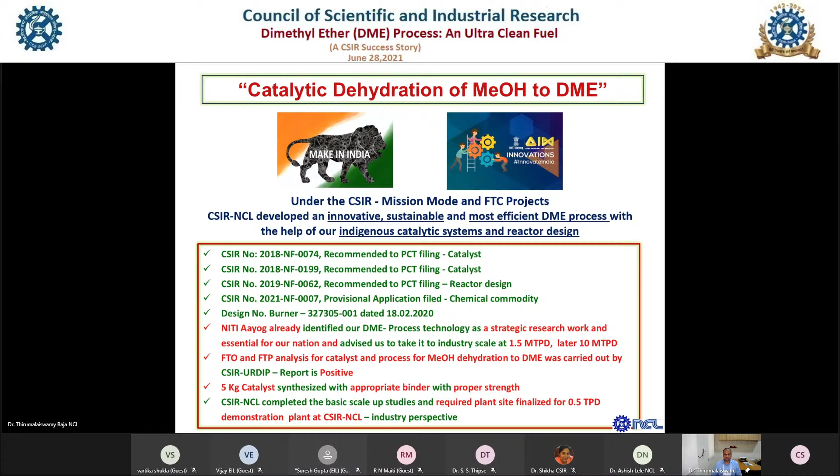What are the properties of DME? As Dr. Ashish Lele told, DME is one of the most promising second generation alternative fuels, and globally it's considered an ultra clean, green, and low carbon emitting fuel.

So we are closely working with ARAI. DME can be used as a fuel in diesel engines and gas turbines without any modification. This possibility is there, so we are doing both things simultaneously with ARAI.

And giants like Nissan and Volvo developed heavy vehicles running on diesel engines in past years. So LCV as well as high commercial vehicles are also possible with DME as a fuel.

As an alternative fuel, when compared with fossil fuels, DME performance demonstrated a number of significant benefits. One is less pollutants like hydrocarbons, soot, and particulate matter, less CO2, less nitrous oxide, and no sulfur oxides than conventional fuels, which help restrict the level of pollution across the country. When using DME as fuel, engine noise will be less with high fuel economy.

Ignition character is also equivalent to diesel engines since it has high cetane rating up to 55 to 60 compared to fossil fuel diesel. It has a low boiling point of minus 24.8, which provides fast fuel-air mixing, excellent cold start, and reduced ignition delay in cold countries.

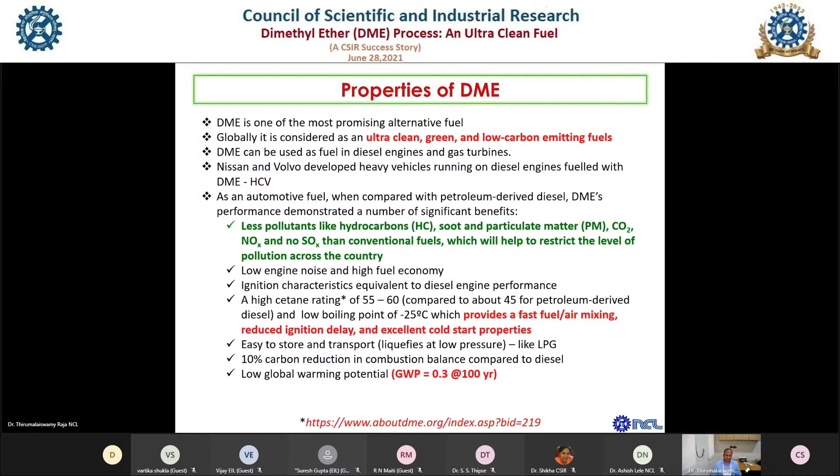It has very good properties like domestic LPG, easy to store, easy to transport, and easy to carry everywhere. There's a 10% carbon reduction in combustion balance compared to diesel, though we are still awaiting ARAI results. It also has very low global warming potential, 0.3 at the rate of 100 years.

These properties are for comparison. As I said, it is equivalent to LPG. LPG is nothing but propane, whereas in our country propane and butane vapor pressure is almost equal, so it can easily substitute up to 20%.

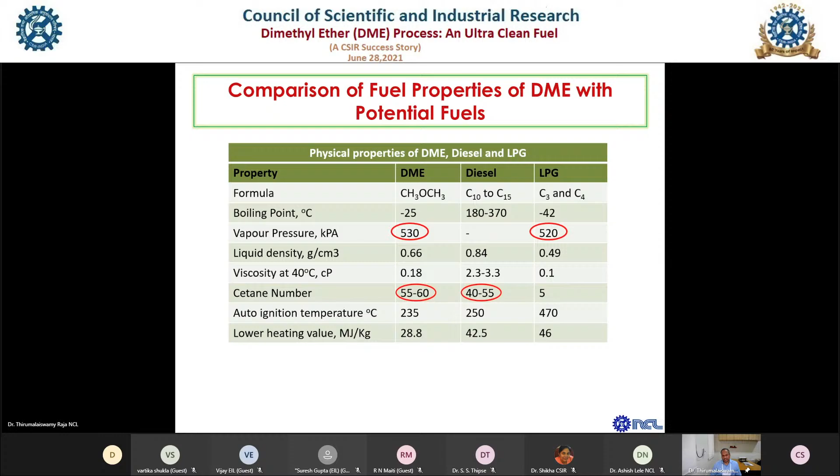The cetane number when comparing to diesel is almost equal, so it can be replaced for mostly LCV and HCV. We are even trying to extend this to ships and other applications through government schemes.

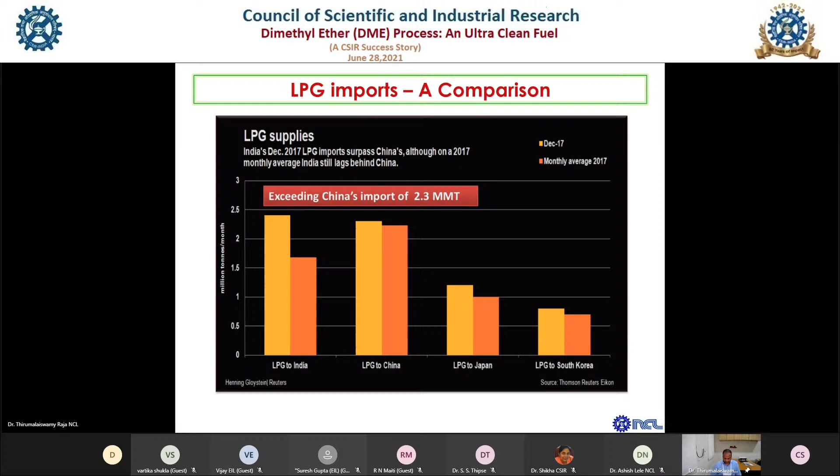We need to curtail this kind of foreign exchange spending on LPG imports. So CSIR developed an ambitious project through mission mode to reach the people, one being DME as a substitute for LPG as well as diesel. India is the world's largest LPG importer, and in 2018-19 India imported around 226 million metric tons of crude oil, from which LPG comes.

The ambitious project of Prime Minister Ujjwala Yojana provides clean cooking fuel for below poverty line people to give energy justice, which drives the demand furthermore.

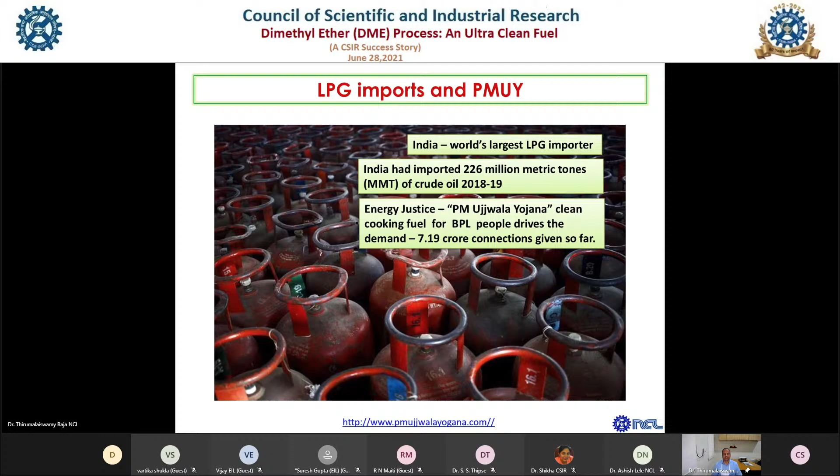So far we have 7.19 crore connections given, and it's likely to be more due to COVID and lockdown reasons. The government's push to provide clean cooking fuel to every household has turned India into the world's second largest LPG consumer, whose demand is projected to rise 34% by 2025.

The compounded annual growth rate is 15% comparing 2014 to 2017 LPG consumers. Rapid increase in population combined with LPG penetration in rural areas has resulted in average growth of 8.4% in LPG consumption, making India the second largest consumer and importer of LPG globally. As per our Oil Ministry's projections, LPG consumption is expected to grow to 30.3 million tons by 2025 and 40.6 million tons by 2040. So the demand is clearly more.

So we need to give a technology which is self-sufficient and self-reliant within India. CSIR developed, in 2017-18, a mission mode project, and under this we developed this technology. Already India has 191 LPG bottling plants operated by PSUs, and with our technology we can have something modular and easily mobile. We can put it there and blend it with LPG with DME around 20%, or whatever the regulations allow, and supply it through 22,654 LPG distributors.

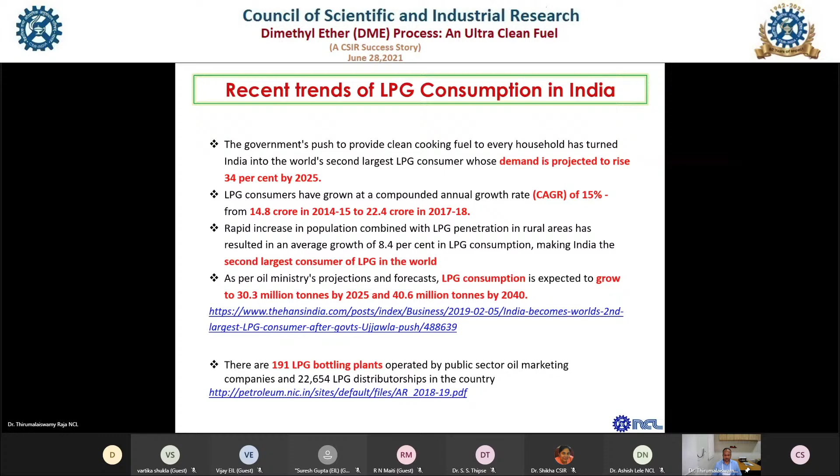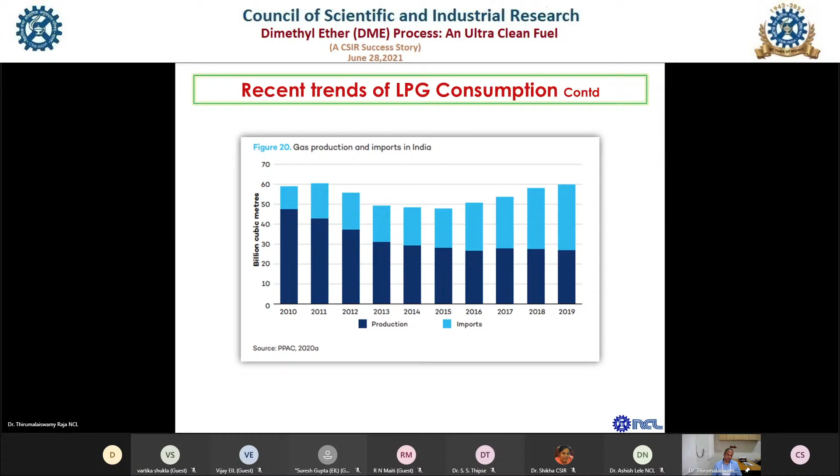The import is quite high here. This is a graph of LPG consumption, crude gas production, and imports in India. The production is almost steady state, while the imports are growing exponentially. So we need to take care that foreign exchange should not go out.

So what did we achieve during the process of the DME project? Two molecules of methanol give one mole of DME and one mole of water, and it does not lead to olefins, which is an impurity particularly for fuel. Whereas we've patented a process where, under certain conditions, we can also get olefins - we know how to produce olefins using the same process.

Under this project, around 50 catalysts were synthesized and screened for activity and selectivity, and the best one was selected. The optimized reaction conditions are 250 to 280 degrees Celsius at atmospheric pressure, as well as at 10 bar pressure, for the best catalyst. Conversion achieved was 88 to 89%, with 99% selectivity for DME at atmospheric pressure.

The scale of operation ranges from 1 gram to 1 kilogram - lab scale to pilot industry scale. At 10 bar high pressure, because of the post-processing unit we need higher pressure, even up to 12 bar. Conversion was achieved through our modified patented reactor, reaching 99% conversion and 99.5% purity or selectivity for DME.

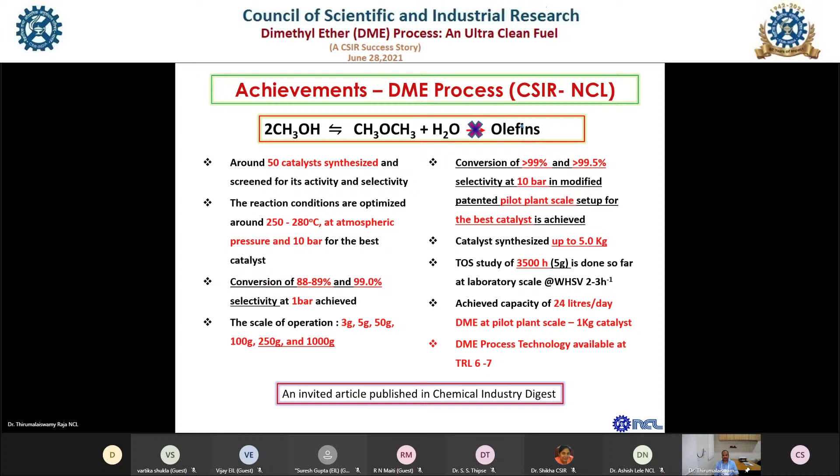At present, our technology level is around TRL 6 to 7. Now let's show a small video of how we were evolving.

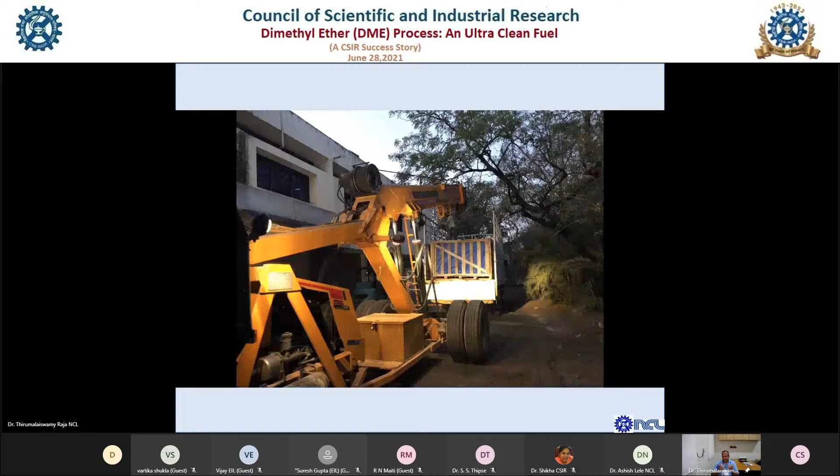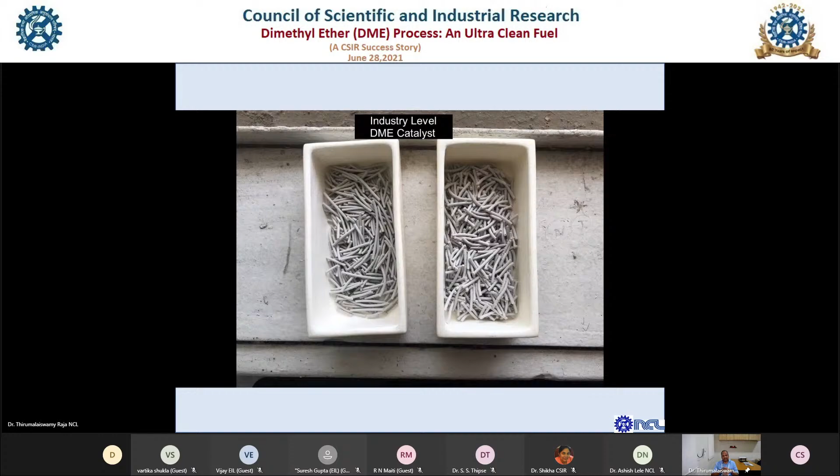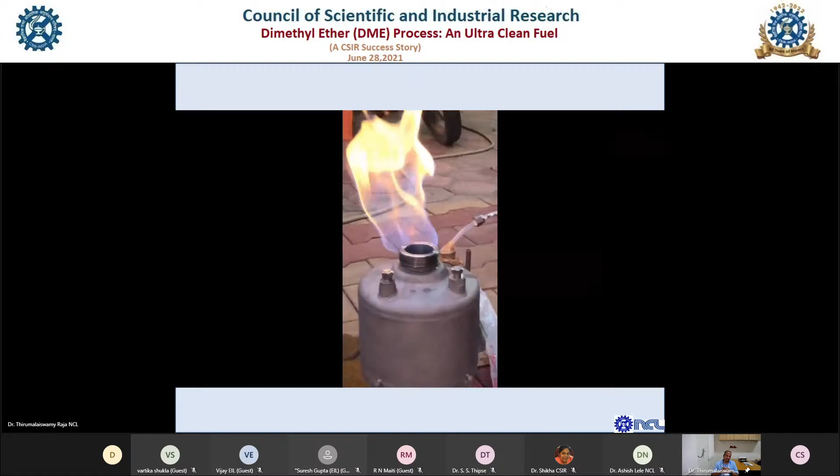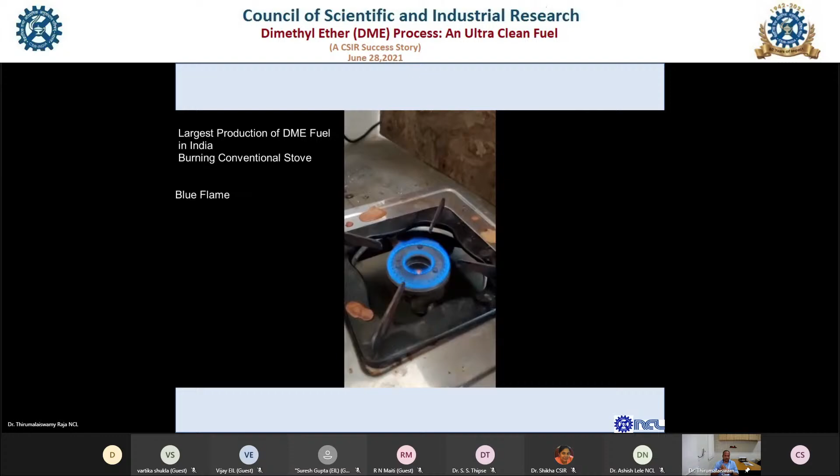This video shows NCL and how we obtained the instruments. This was a meeting at the pilot plant developed at the university, and this is the DME plant with world-class facilities - patented reactors installed for all users. This shows an industry-level setup with different reactor shapes, a trial run with DME, and the first time in India rolling out DME with all safety precautions in the lab. This demonstrates the reactor at the highest level of DME production, demonstrations with other companies, large-scale DME production, and testing on a conventional stove for cooking gas.

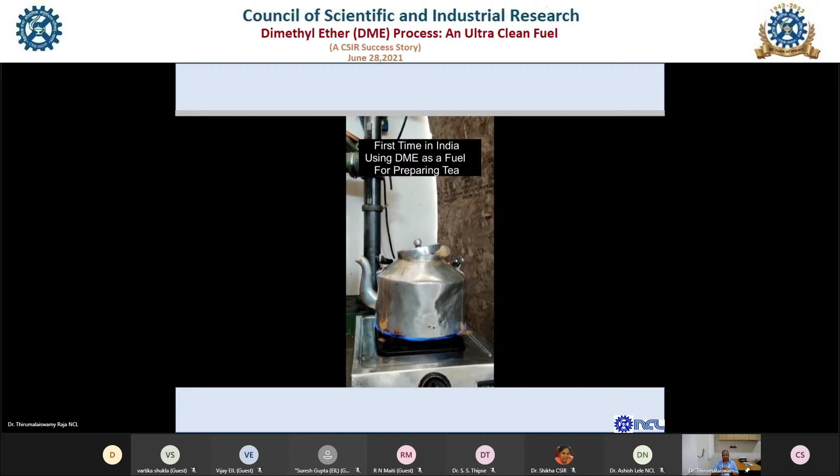Then, for the first time, early morning at 6 o'clock, we prepared tea using DME as the fuel.

For this indigenous catalyst and how it evolved, how best our catalyst is, we have taken all our available commercial catalysts and compared them with our catalyst and our sister laboratory catalyst. When you see the different space velocities as well as different temperatures, NCL is giving an optimum temperature of 260 to 270 at atmospheric pressure at a space velocity of 2. It means that if you are putting 1 kilogram catalyst, I can put 2 liters, so the productivity will be more.

And here there is no co-feed with nitrogen or any inert gas, whereas all over the world they are using N2 as a co-feed. So NCL's indigenously developed catalyst is showing better activity compared to the available commercial catalysts.

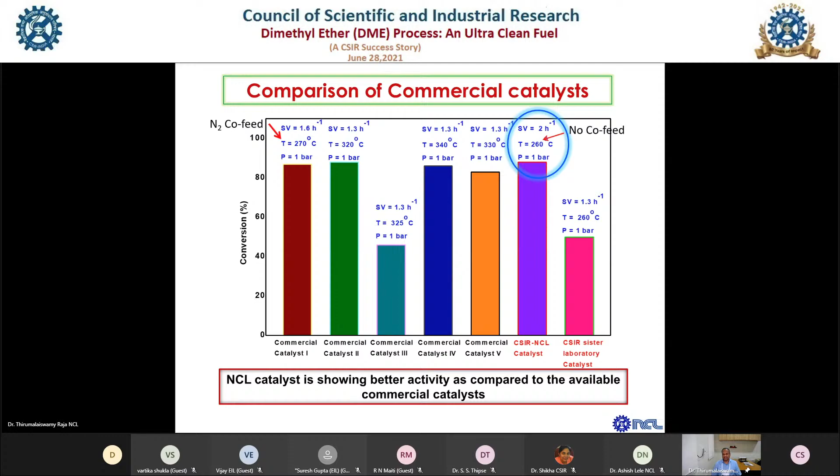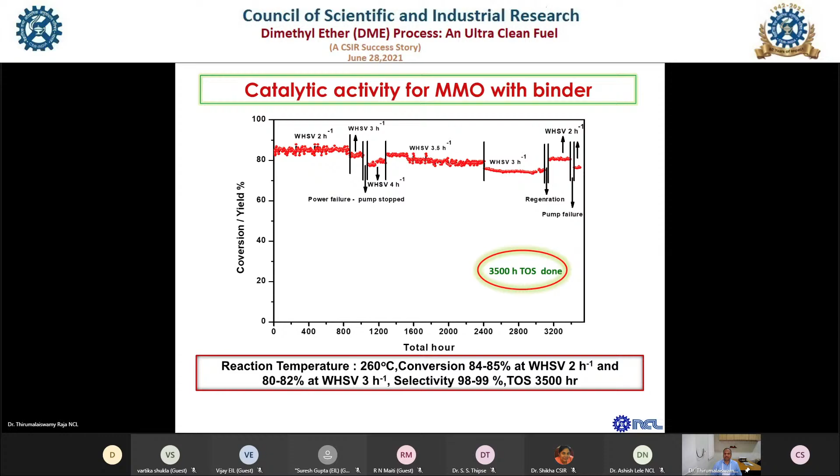This is very important for anyone interested in our technology. As I said, we are patented or IP protected for our catalyst as well as the reactor. So comparing the conventional reactor with the modified reactor from our engineering team, under different conditions our modified catalyst and modified reactor improved conversion as well as yield of DME. The patent is already granted and published.

We have practiced almost 1 kilogram catalyst loading level, as well as 250 gram, at different space velocities.

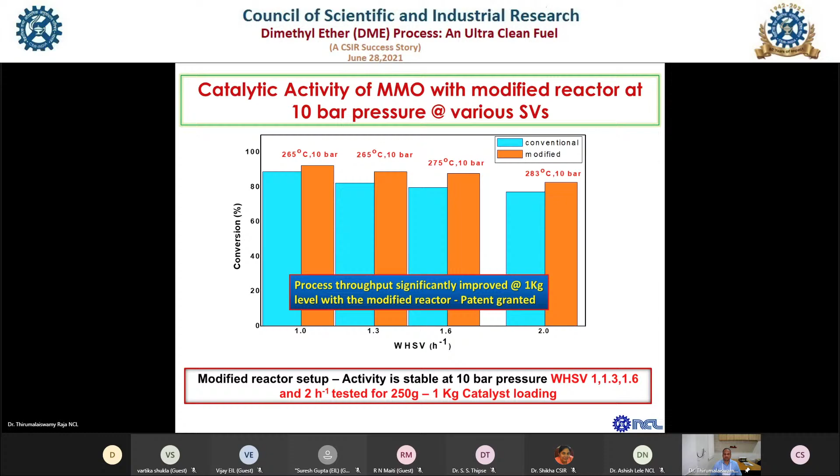Catalyst scale-up has also been done at 5 kilogram and now 10 kilogram scale, achieved with different shapes and extrudate shapes as well as different kinds of binders. We finalized one with a separate binder at a different percentage, and then developed crush strength testing both with the vendor and ourselves, so it has good crush strength and will not crumble during loading at higher scales.

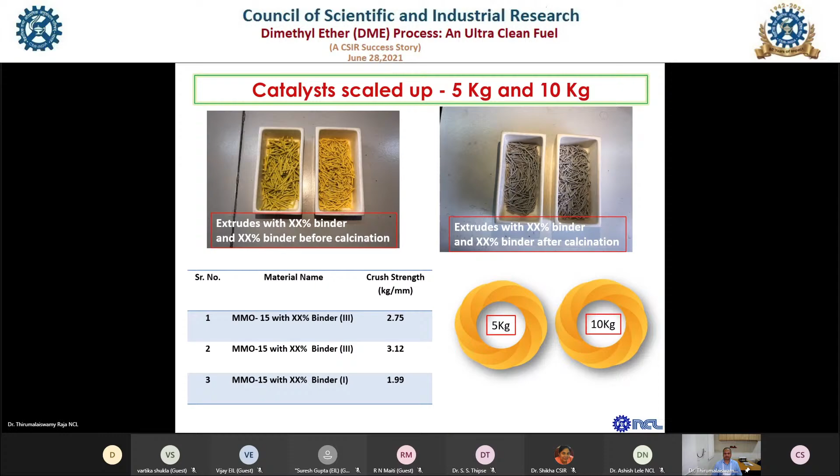These are the pilot scale patented reactor reactions. We are practically getting 24 liters per day. Here also we ran this catalyst for 575 hours time on stream. As I said, in the conventional reaction almost 85 to 88% conversion is coming.

When we put distillation coupled with the reactor to remove the water molecule, along with heat integration, the conversion comes to almost 100%. The product also improves, and the exothermic reaction heat is utilized properly for the plant.

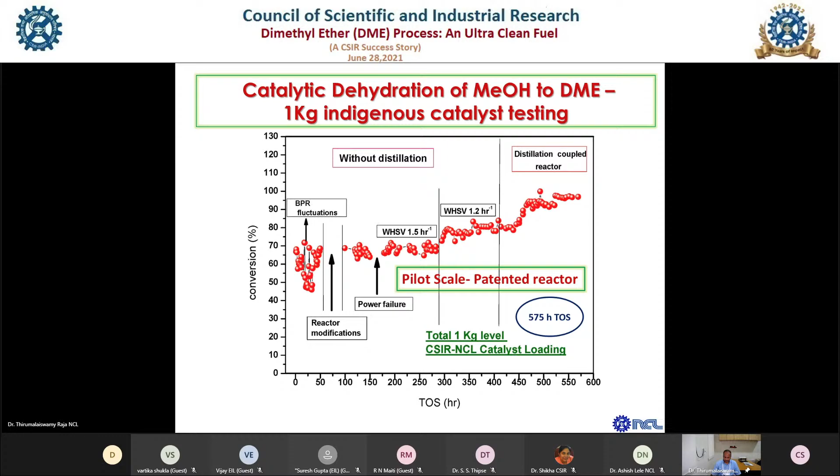And here is a small video once again. Dr. Harshvardhan, our Honorable Science and Technology Minister, visited here personally before COVID, along with Dr. Professor Shekhar Mande, Honorable DG CSIR, and inaugurated our pilot plant. He was felicitated by the ex-director and coordinating person Tania. This is the DME plant which he inaugurated on September 9, 2019.

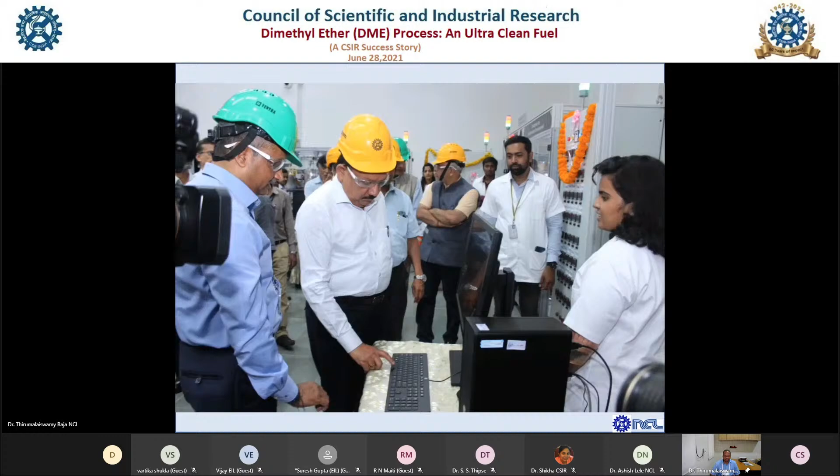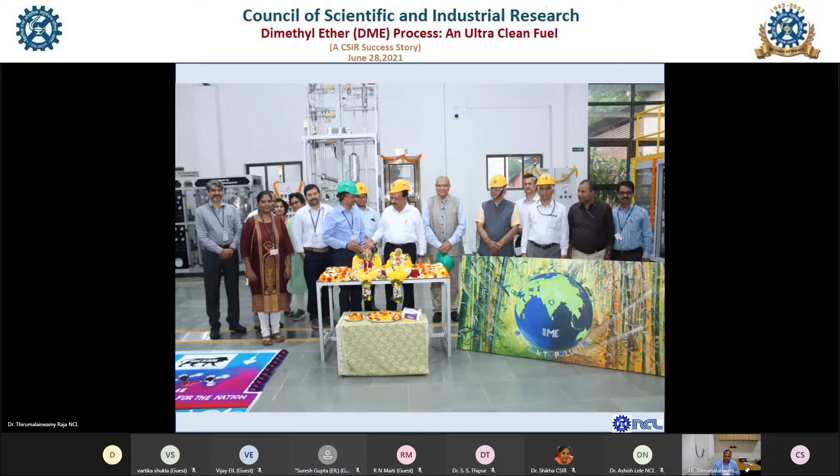So these are my divisional colleagues, and this is my research team, comprising of engineers and scientists.

After getting the DME, we need to utilize it. So we have plans for how to utilize it for fuel purpose, to reach people for domestic burners. This is a PFD of a burner using DME as a fuel. Separately, we have developed a gas stove with the help of CFD - an energy efficient burner that can be used separately. You can use DME as well as LPG-DME blend also.

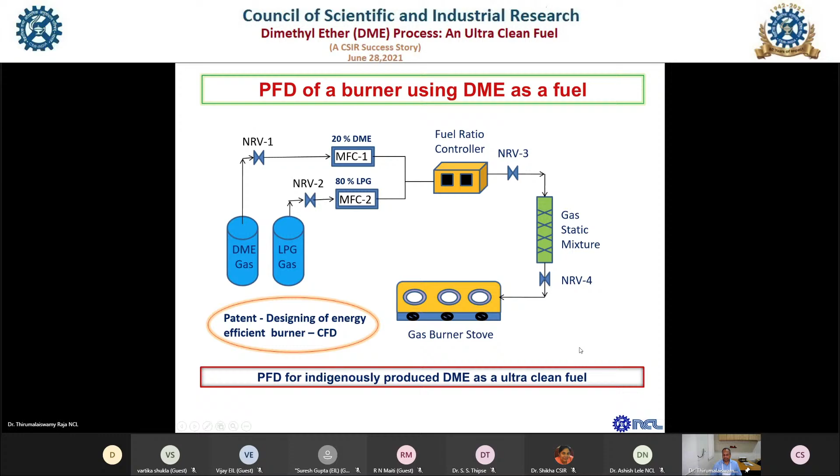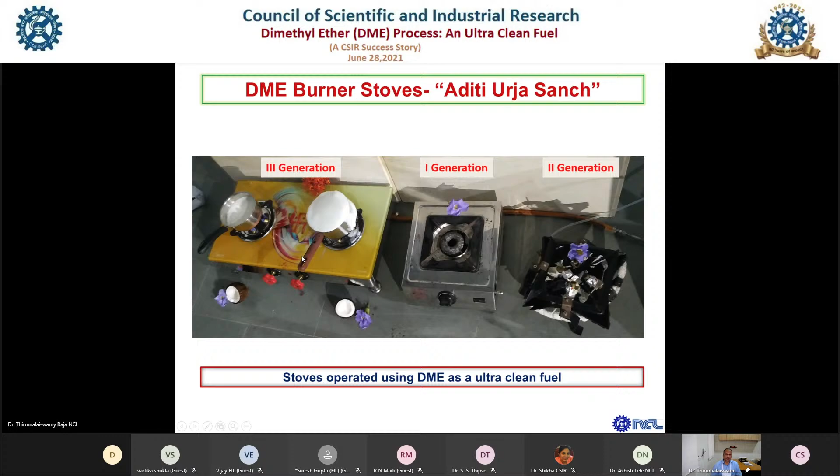The third generation is the domestic fuel stove as such. It looks like a domestic burner, but inside is our technology incorporated. So first time we operated it, boiling milk, and we demonstrated the Aditi Urja Sanch inside NCL with different classes of people, technical and non-technical, to get their inputs and feedback for domestic purpose use of DME as well as DME-LPG blend. This was the first time we used 100% DME directly as a fuel in the burners.

This is a semi-skilled worker, Vijayaraman, and this is Mr. Jogdand, technical officer as well as safety officer in NCL. At their home and everywhere we practiced, examining how it works. He's technical staff, and he is an electrician in the electrical department, along with Mr. Mane, who has helped us a lot with the stove fabrication and everything.

Another one is Yogesh Mahajan, junior technical officer. At home we made tea again, and we demonstrated this stove, making maybe around 500 to 600 teas on the canteen cafeteria itself. Mr. Raut from the mechanical section helped us fabricate the connections and everything, and these are the other beneficiaries.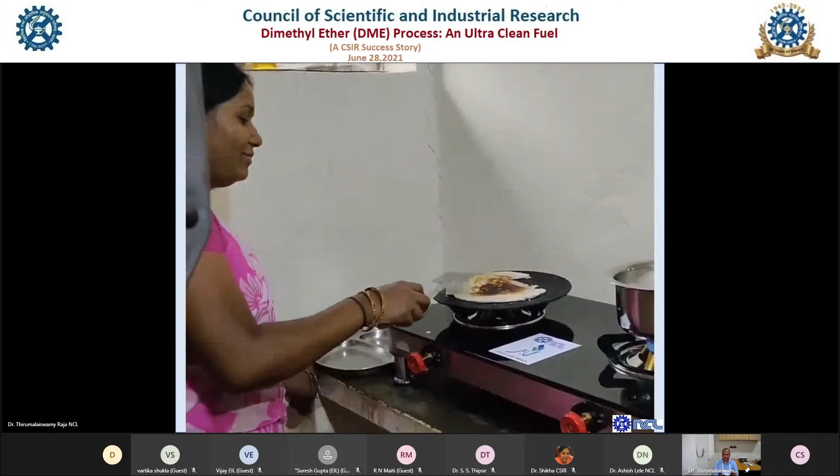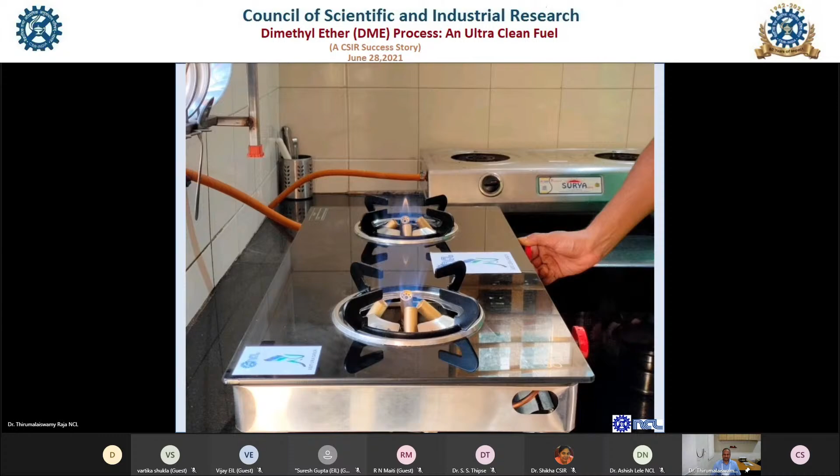For food trials we used this cafeteria - thanks to them, as well as others who allowed us to test our burner and everything.

These are the achievements of what we have done. Data was collected for the performance of Aditi Urja Sanch using DME as a fuel or DME-LPG blend as a fuel for the burner. Indigenously we have developed, designed, and fabricated the nation's first industrial DME fuel boiler unit, which we demonstrated, along with the nation's first DME fuel automotive engine demonstration with the help of ARAI.

The next video shows that this is the first in our country. We have practiced using DME as well as DME-LPG blend, and we also have a DME-LPG blend bottling unit, and combustion trials for actual domestic use.

CSIR also sanctioned a project under fast track commercialization to have a demonstration plant of capacity 0.5 tons per day for our DME process technology, for various collaborating industries. We have also supplied DME-LPG blends to the Bureau of Indian Standards through IOCL.

For the future, we have planned to have 100 liters per day DME, scaled up from what we prepared at 5 kilogram level. The reactor has come under modifications, and we have to start it again. After that, due to COVID, we have hampered a lot of our work here. Once all restrictions are removed, we will continue on this.

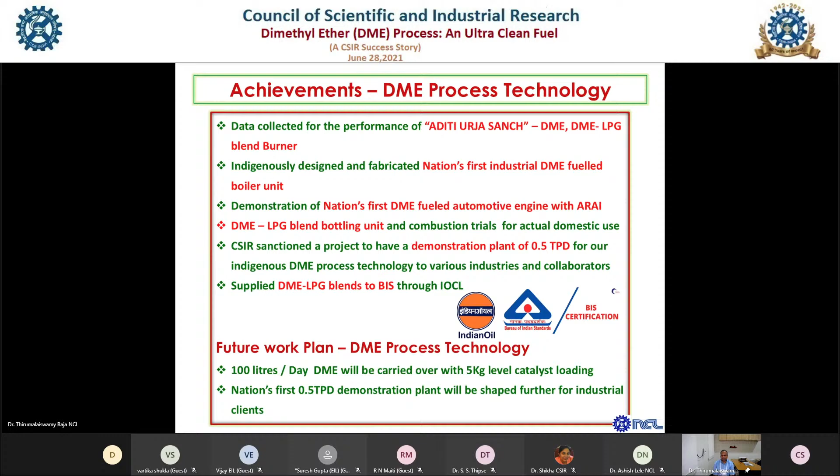We also have the nation's first 0.5 tons per day demonstration plant. It will be shaped further for industrial clients.

We have also signed with ARAI for testing DME fuels and various works, and signed agreements under the sister concern of Deepak Nitrate. And with EIL, we signed an MOU for erection of a large scale unit of DME for refineries and other industries.

And by doing so, what is the outcome for our country, the nations? This DME process technology is more helpful for the revival of methanol economy, which creates employment, and it is offering an ultra clean fuel to bring down the level of air pollution across our country.

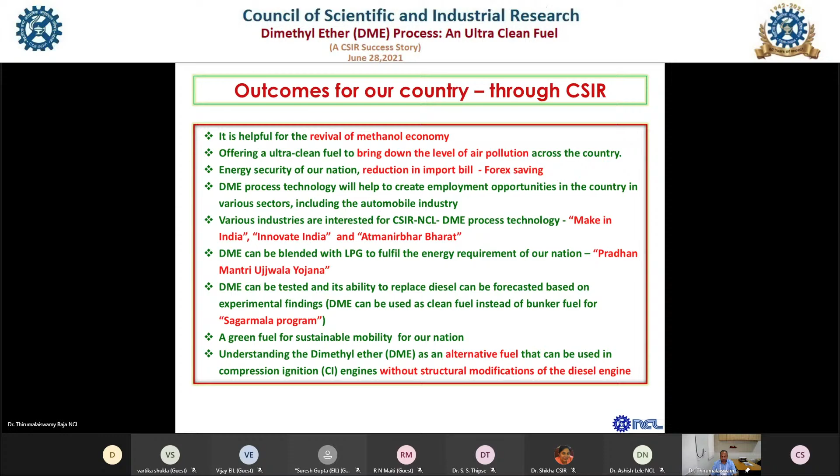I'll talk about the primary drivers which I feel right now for any alternative fuels in India. I've just listed them here.

Of course, the vision of Atmanirbhar Bharat in terms of self-reliance in fuels. Also, GHG mitigation has become very important, particularly the greenhouse gas and global warming effects. We have also signed the Paris COP agreement, and we really need to adhere to the goal of low carbon mobility to ensure compliance to having the temperature rise restricted to below 2 degrees.

Also, local environment pollution plays a major role. If you see, our major cities are being referred to as the most polluted cities in the world. So this is one major issue of concern. And in terms of boosting the economy, having fuels which will generate revenue for the country rather than spending money on importing fuels is one of the major tasks at hand.

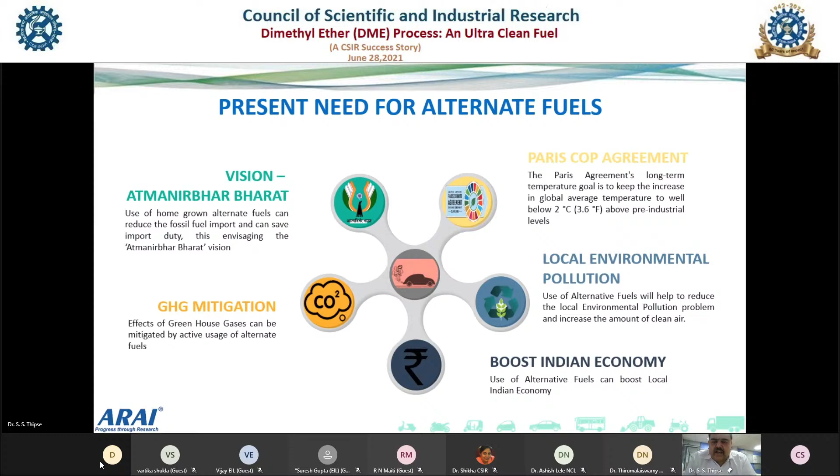And I feel DME fulfills all these criteria. So it is one of the very good fuels for the future.

Going further, Government of India has released notifications for several alternate fuels. Now, in the last few years, we have seen notifications ranging from bio-CNG, ethanol, hydrogen CNG. But the most important thing to me is the first synthetic fuel notification, that was for DME, which was released in January 2020 - a real landmark because we had notifications for gaseous fuels, we had notifications for biofuels, but

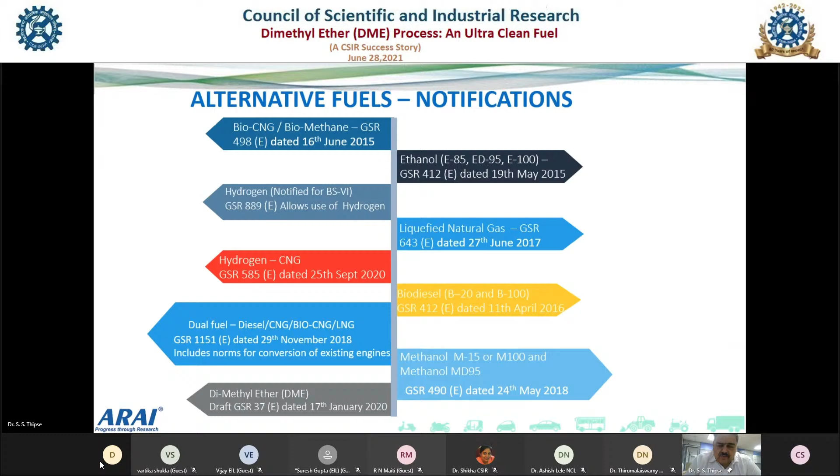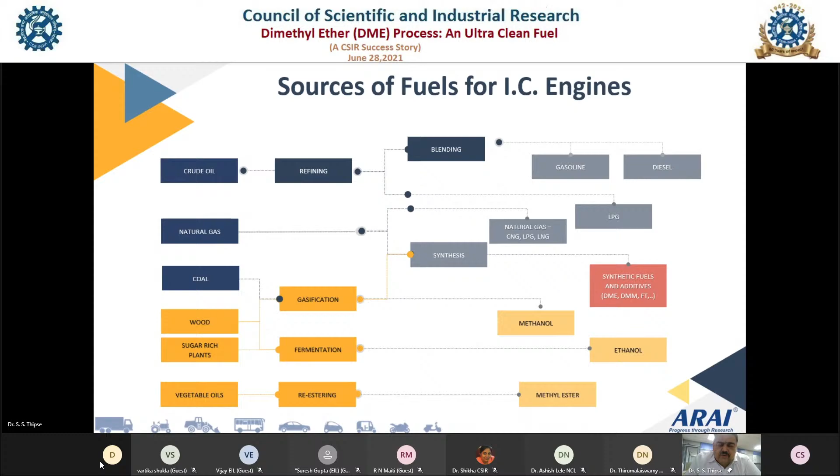to have a notification for a synthetic fuel in itself was a big achievement. And I must say that ARAI played a major role in terms of releasing this notification closely along with the Ministry of Road Transport. Now, we are in the area of alternate fuels, and synthetic fuels play a major role. Now, DME can be generated from multiple sources.

Traditionally, it is formulated from natural gas synthesis. But now the method developed by NCL is to dehydrate methanol and then generate DME. That's a very good method. And essentially, as an engine fuel, it's ideally suited for a compression ignition engine because it has a cetane number more than 55. So really, it is one of the very good fuels.

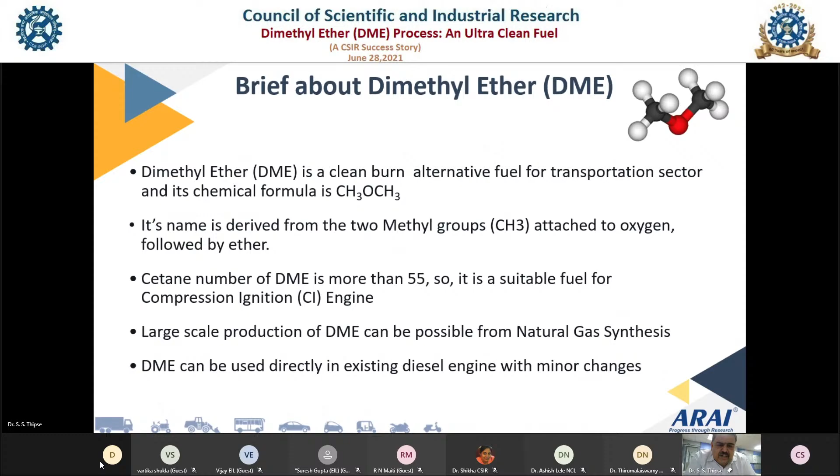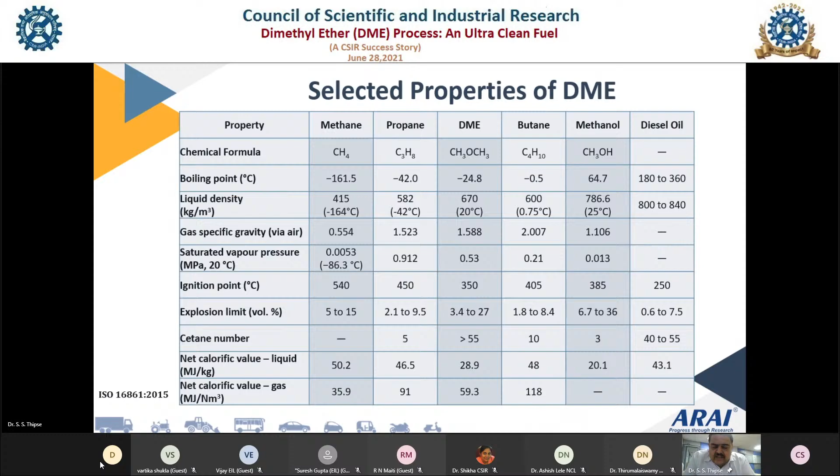I'll give some data, international data also, and what ARAI has done in this. If we see it property-wise, it has excellent properties, more like a vapor at room pressure. And then when you pressurize it, it becomes something like a liquid. So the characteristics are similar to LPG, and hence you can store it very easily in an LPG cylinder. These are some of the characteristics which make DME very simple to handle. So it is an ideal CI engine fuel, but the characteristics of handling are similar to LPG.

Then again, as I mentioned, DME can be produced from multiple methods, but I think dehydration of methanol is a good area where we can work.

Then DME worldwide - who has done what? We found there are certain studies already conducted worldwide on DME, particularly in countries like Sweden, where Volvo was very much involved in using DME as a truck fuel. USA also did some basic work on DME with government labs, and in Germany, Aachen University and others have also partnered. Denso has supplied the fuel injection equipment. AVL also, in Austria, has worked on DME fuel and developed a DME common rail.

As far as India is concerned, DME was initially started off way back in '98 with IOCL, GAIL and IIP. But then later on, not much progress was done. And eventually ARAI and NCL got together and we demonstrated the first three-wheeler on DME-LPG blend.

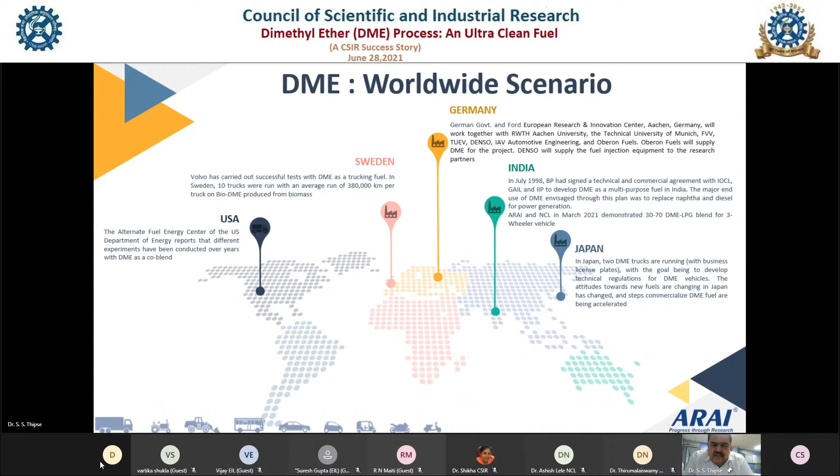Then in Japan, 2 DME trucks are running with the technical regulations. A lot of activity on DME in Japan - they have several standards and they are contributing to ISO standards also.

If we see the worldwide applications, this is a multi-purpose fuel. There are multiple applications - it's not just restricted to automotive, but it's useful for power generation. Again, Dr. Raja showed many of the different applications.

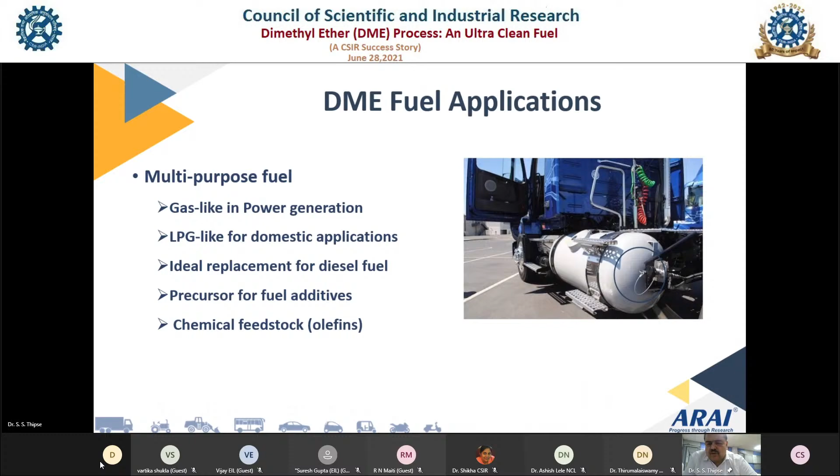So DME is a precursor to fuel additives. It can be an ideal replacement for diesel, or for LPG and so on. On the right side is a truck based on DME running in Sweden. These are some of the engines already developed worldwide: Volvo truck, Scania, an SAIC engine in China, and a Mack engine also running on DME. Typically these are 6-cylinder, 8-cylinder engines suitable for truck applications.

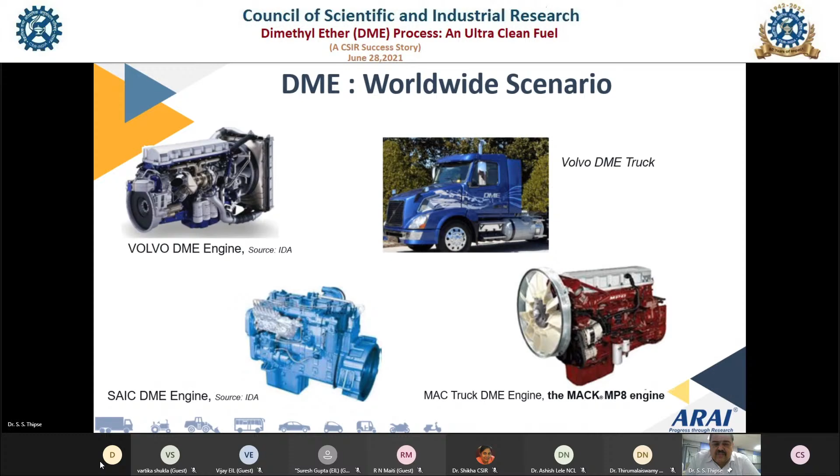The truck application works because, in terms of characteristics, DME is similar to diesel, so the torque and power characteristics are good. Although the calorific value is less, that can be compensated by having different turbocharging techniques, special applications, increasing manifold volumes, and different ways to recover the power loss due to lower calorific value.

Coming back to standards and regulations, India has already adopted the ISO standard for DME. This fuel standard has been dual marked by our Bureau of Indian Standards, and that standard is already adopted - ISO 16861 for fuel quality. So we already have a DME fuel quality standard in place.

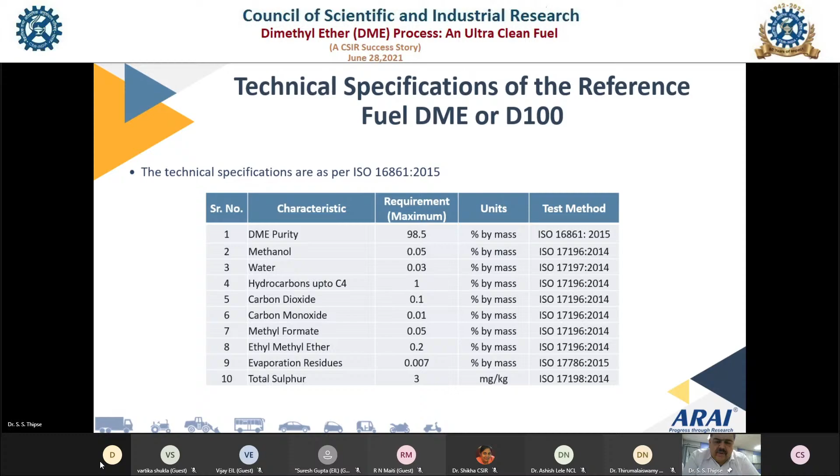The second point is, as I already mentioned, GSR 37 has been released, and DME as a fuel for both below 3.5 ton and above 3.5 ton vehicles, as well as three-wheeler vehicles, the norms have already been released. What tests are applicable have also been specified. This is the reference fuel, ISO 16861, which India has adopted with a purity level of 98.5% and all the remaining parameters as explained.

Then the components. Just having a fuel standard is not enough; we also need component standards. By component, I mean the fuel systems, injectors, valves, and pressure relief devices. So we are adopting the ISO 22760 series. There is a committee, BIS TED 26, chaired by ARAI. I am the chairman of that committee, and in it we are discussing and adopting various fuel system components.

We have CNG with the ISO 15500 series, LPG component series, and similarly we now have the DME series. In that, there are almost 18 to 19 component standards. At least 6 parts are already developed and in wide circulation. This committee is going to finalize all the component standards, which will ensure there is a safety net for Indian manufacturers. They can conform to this standard, which is at par with ISO levels, and then supply these systems in India.

We are also developing the AIS safety standard for DME and LPG. The LPG safety standard is already available, but we are now adopting the same standard and extending it to DME and DME-LPG blends. Only thing is the gas cylinder rules need to be amended for DME, so we have initiated dialogue with PESO for inclusion of DME as a fuel, since the Ministry of Road Transport has already notified it. We are hoping PESO would allow DME storage in LPG cylinders. Those discussions are already in place.

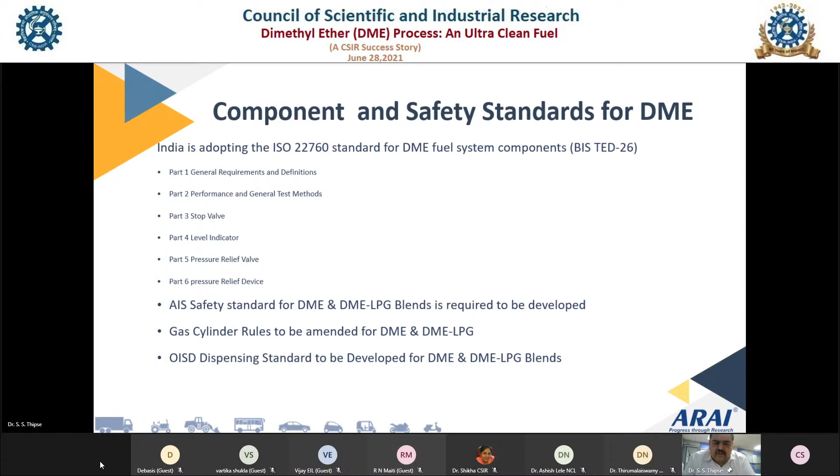Coming to the use of DME in CI engines, one of the unique characteristics of DME is it has a low boiling temperature. Low boiling point and high vapor pressure mean you need some changes - the fuel supply has to be pressurized, you can't give it at room pressure, so you need a pressurized fuel supply. You also need to ensure proper sealing to avoid any leakage. We also have to modify the plunger diameter and nozzle, because we need more fuel to get the same amount of energy due to the lower calorific value fuel, and injection optimization is also required.

Further, we need storage tanks - slightly larger capacity tanks to have the same amount of fuel to get the same range as diesel. This storage pressure is typically similar to LPG, as I mentioned, 8 to 10 bar, typically average 9 bar.

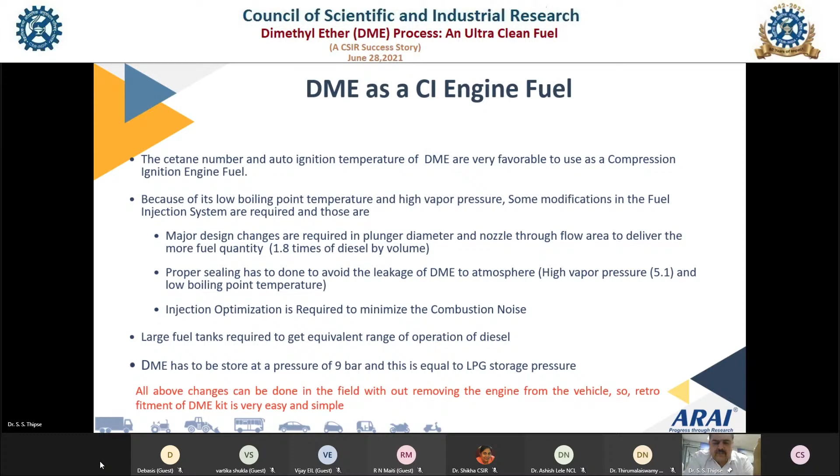All of this can be done very easily in the field. You can put the DME tanks, make the changes with minimal changes in the engine. So retrofitment of DME is very, very simple as far as the vehicle is concerned. It is not a very big job like CNG, where you have to change the entire engine configuration from compression ignition to spark ignition and then adopt the CNG kit. Here, nothing like that is required. It's a very, very simple adoption.

There are a lot of advantages too in terms of clean combustion. I'll share some data also. It's totally non-toxic, has low global warming potential, and is easy to store. So there are many advantages for DME, which is ideal from an auto perspective.

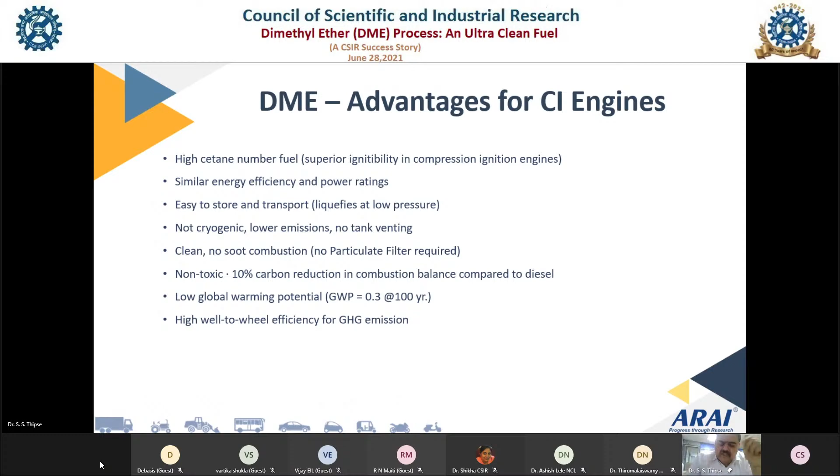But there are some challenges also, as I mentioned, the calorific value, the high vapor pressure. That means the system has to be pressurized. We really need to worry about gasket and seal material compatibility. So that kind of data exercise ARAI has already started in terms of following different ASTM protocols and studying the metals, non-metals. We did similar work for methanol, we did similar work for ethanol, and now we are in the process of doing this for DME.

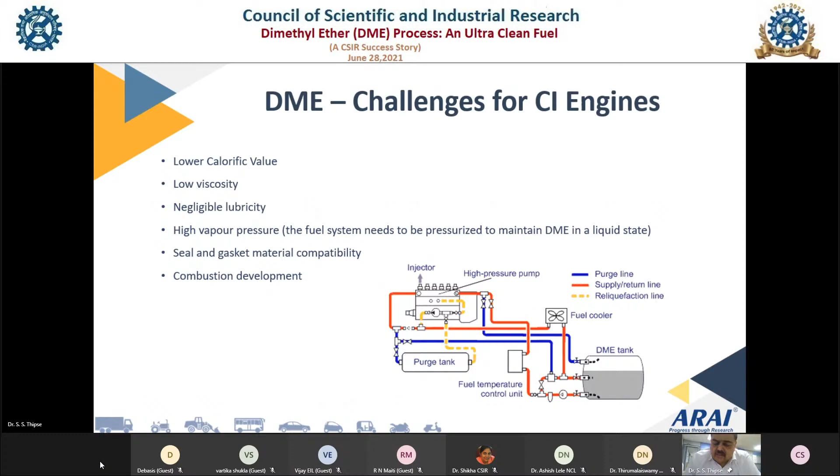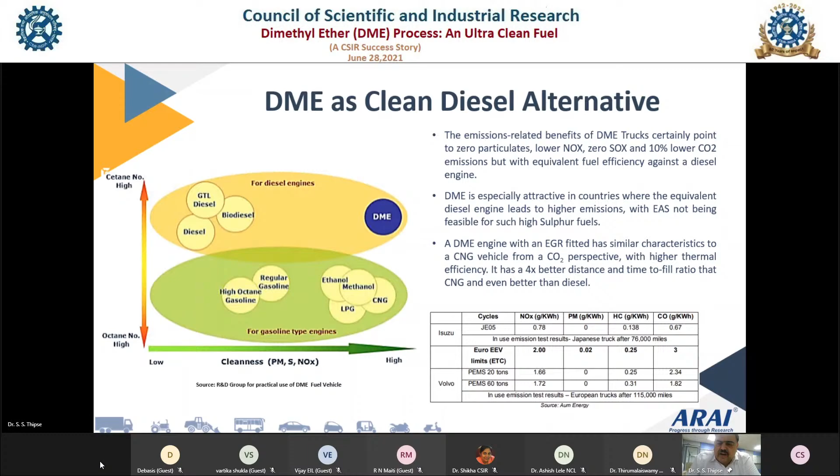Combustion is another area where a lot of work is being done at some IITs also. DME is ideal, as I said, a clean diesel alternative. There is a lot of reference data available worldwide where people have done DME and found that it has excellent characteristics. This is data from Isuzu and Volvo, and they found it meets the best of the emission norms.

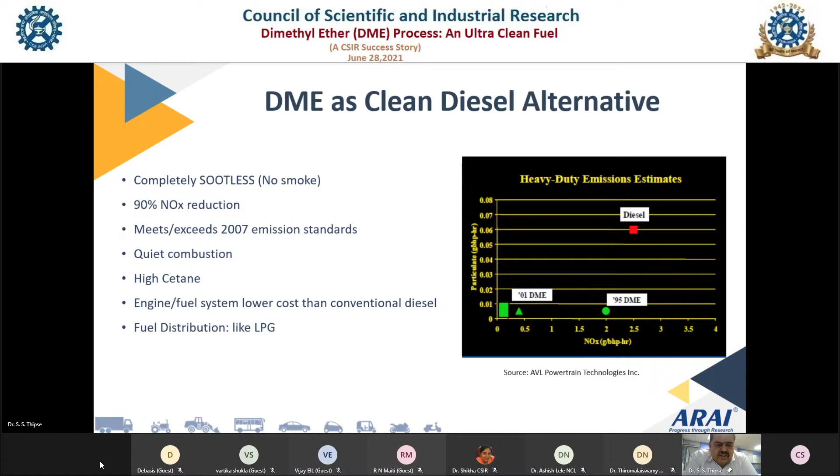So it's a winning combination. And this is data from AVL, which shows that the DME engine is far cleaner than diesel. Almost no smoke observed in the combustion, 90% NOx reduction, and it meets all kinds of standards. So this is data from AVL.

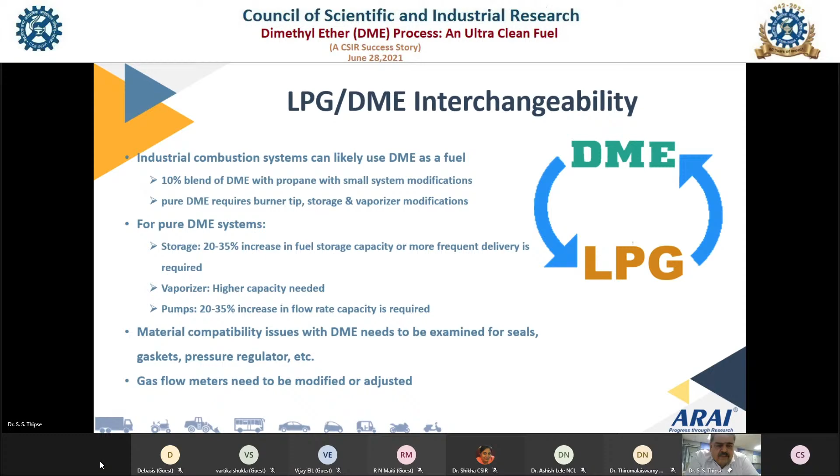Again, other applications - DME and LPG interchangeability. One can look at developing DME as a fuel for replacing LPG also, or it can be used along with LPG also. Both possibilities are there, and both can be considered here. So, okay, I'm sorry, I think I went ahead - pardon that.

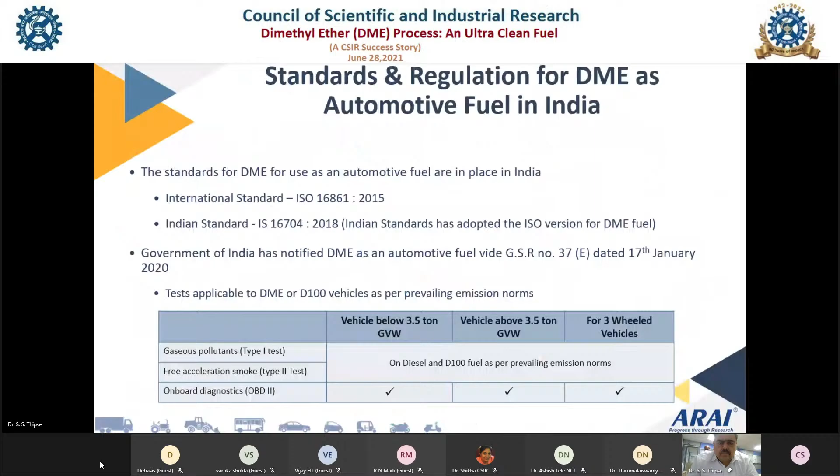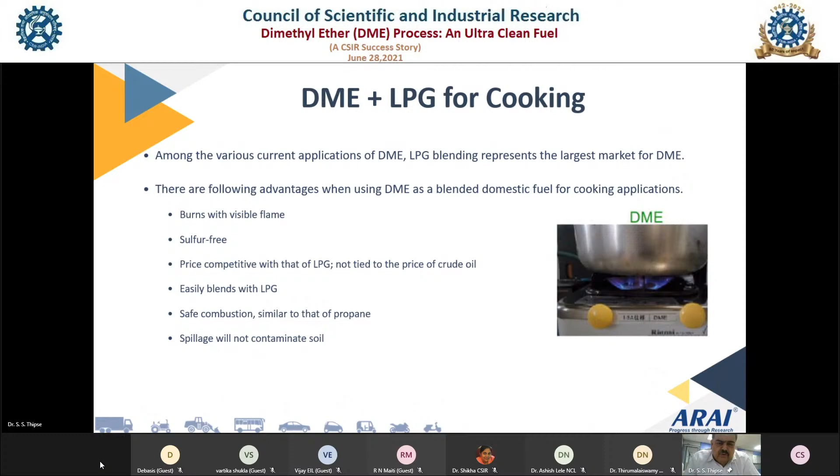Then coming next is DME plus LPG for cooking. Dr. Raja already mentioned that this is also a topic of great interest for India, and there DME plus LPG can be a very good source to supplement and make up for the deficit of LPG, especially with the Ujjwala Yojana being introduced. And I think that's a very good initiative.

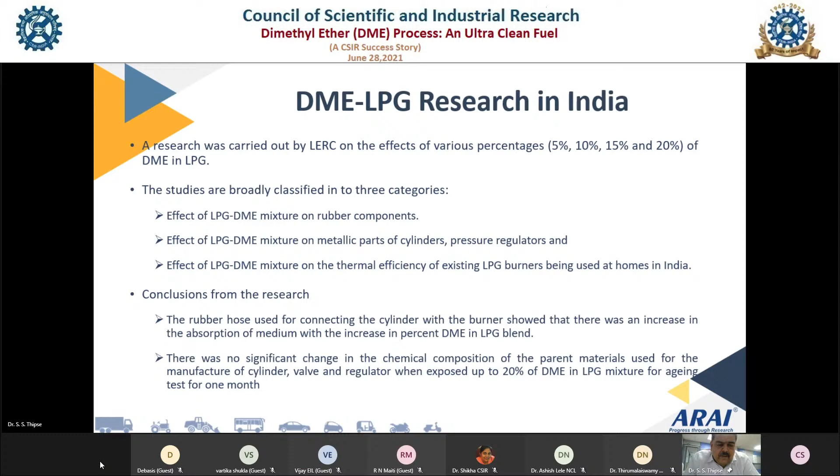Again, in terms of DME LPG, research was carried out earlier by LERC also. They tried to do a lot of work on burners, and they did some excellent path-breaking work, and then later on it was carried out by NCL. So a lot of conclusions, and ARAI was slightly associated with LERC at that time.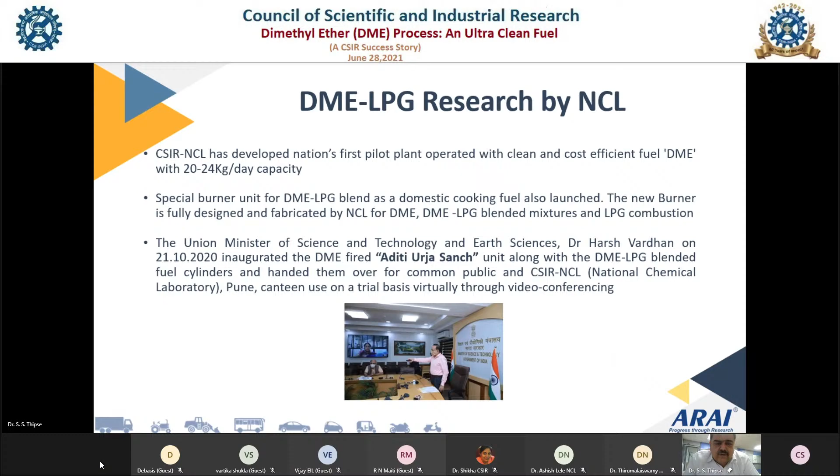Then NCL again - Dr. Raja showed the planned inauguration by the minister, and also the inauguration of the unit. And we were very happy to associate with this whole program.

And this is the vehicle which Dr. Raja showed. This was from TVS Motors. With their kind permission and assistance, we were able to source the vehicle, and we were able to undertake trials at ARAI on the three-wheeler chassis dyno with all kinds of instrumentation.

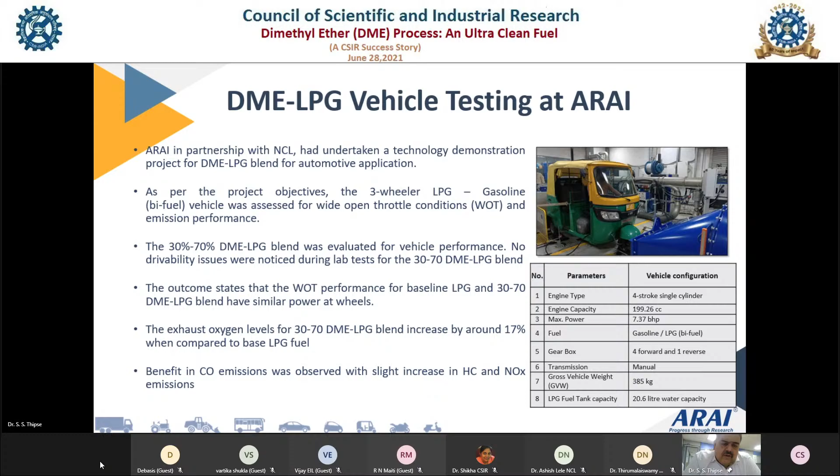We evaluated various blends of DME LPG, particularly 30-70, 50-50, then 20-80, and generated data on different blends. We found that the exhaust oxygen levels increased by around 17%, and there was a benefit in CO emissions observed with a slight increase in HC and NOx, but that can be taken care of by tuning. We are still doing that. We are now awaiting the final configuration. And also for the catalyst, we have not done any modifications, but with the modified catalyst, I'm sure the performance will further improve.

So as far as I'm concerned, driving forces for DME in India is that it's a well-researched and tested fuel over the last 10 to 15 years in several countries. It is one of the tried and tested technologies, easy to blend with LPG, established technology available, and environment friendly. So you have something which has worked outside, which is environment friendly. It can be easily made, and thanks to the path-breaking efforts of NCL, now DME is very much a reality.

I remember a situation 8 to 10 years ago where we had tried in ARAI to initiate a project on DME, and we were told it's too early, and unfortunately we were not able to source DME at that time.

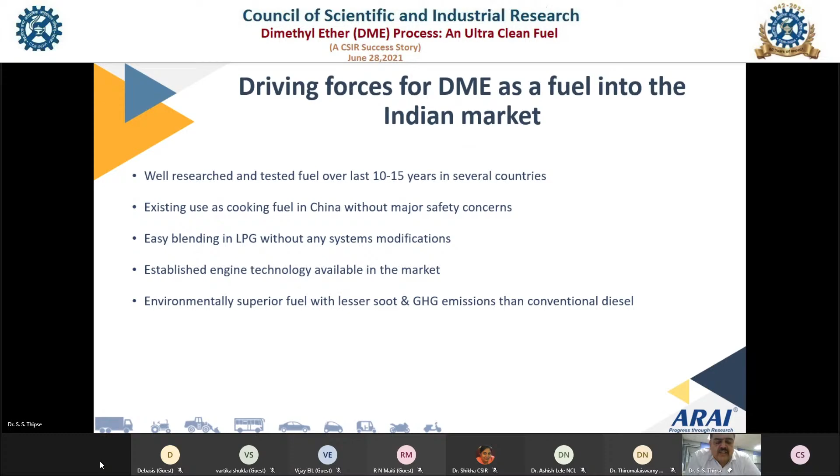We even asked Indian Oil, and unfortunately nobody was able to provide us the fuel at that time. But now I am happy to say that we at ARAI have initiated 2 or 3 technology development projects, and we will also look at DME for heavy duty applications. I am very happy to note that we have signed an MOU with NCL, and we'll be working closely with NCL for taking this DME program further in India.

But there are some concerns in terms of material compatibility, and awareness among people is very much lacking. So I think we need seminars like this, particularly reaching all kinds of regulatory authorities, and also educating end users on the benefits of using this fuel, how it could help Indian conditions, and how this fuel is suitable for India. And again, fueling stations and infrastructure and all that is required.

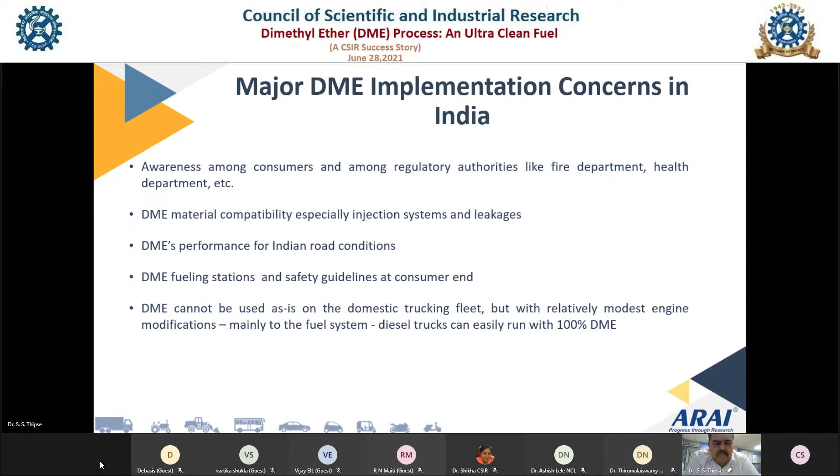But definitely one can say that it is a fuel which has huge potential, especially if you talk about the trucking sector, where CNG cannot be used, or vehicles are still running on diesel in many remote areas of the country. I think DME can be a very good fuel for those considerations. So there is a lot of potential for DME.

That's all from my side. Thank you again for having me here, and I'll be happy to answer any questions which anybody has.

Thank you very much, Dr. Thipse, for such an informative talk, giving us an overview on the international and national positions of DME and its applications in the transportation arena, also the stages and regulations for the development of DME fuel systems and its components. It's very good to know about the collaboration between ARAI and NCL for commercial applications of DME.

So thank you again to all the speakers for your informative talks and sharing information on DME technology. We have a few questions from the viewers that I would like to take up with all our participants here.